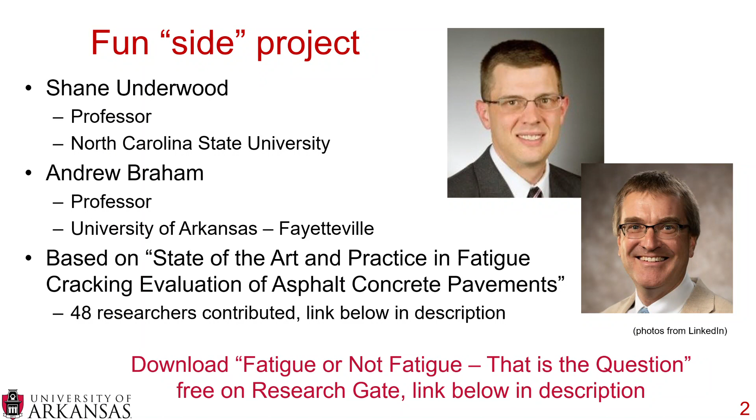So why did Dr. Underwood and I put together Fatigue or Not Fatigue? That is the question. Well, it's because we were struggling to reach a consensus on characterizing fatigue cracking. Why were we struggling? It's because there are over 12 experimental methods and over 12 analysis techniques all dealing with fatigue cracking in the field of flexible pavements.

That's a lot. We know it's a lot because if you look at some other common distresses, such as low temperature cracking and rutting, there are only about 4 test methods for low temperature cracking, and only about 5 test methods for rutting. So compared to those, we have a lot of experimental methods and analysis techniques to quantify fatigue cracking.

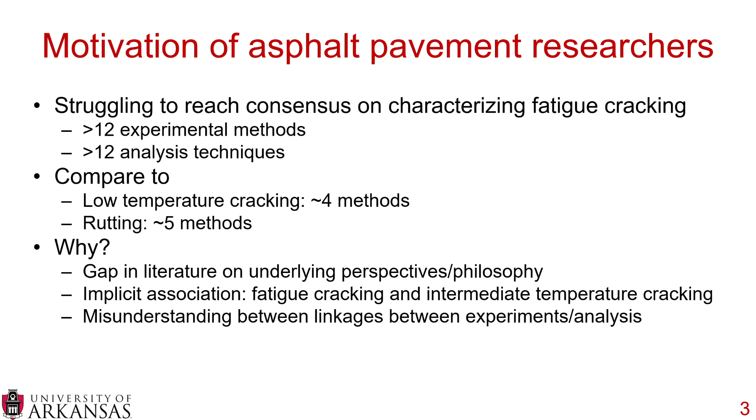Now, why did this happen? We believe there's a gap in literature on the underlying perspectives and philosophy of fatigue cracking. We think that over the years, an implicit association has been developed between fatigue cracking and intermediate temperature cracking. And finally, we believe there's a misunderstanding between the linkages of experiments and analysis for fatigue cracking.

There's quite a bit to unpack in those 3 whys. There's a lot of fatigue tests out there, a lot of fatigue analysis techniques, and those whys are what started motivating us to dig deeper. So how did we begin to unpack this sequence?

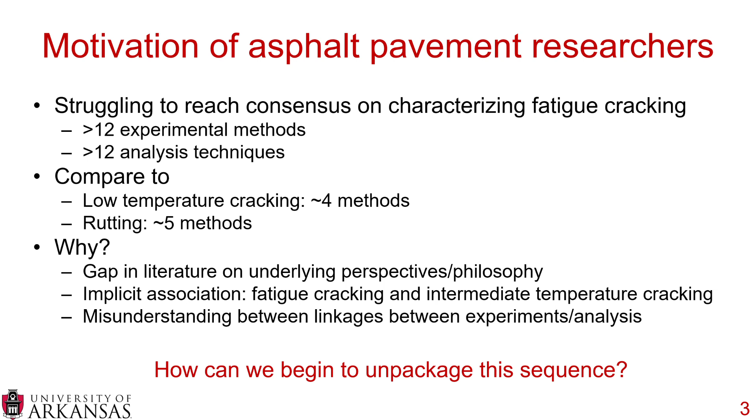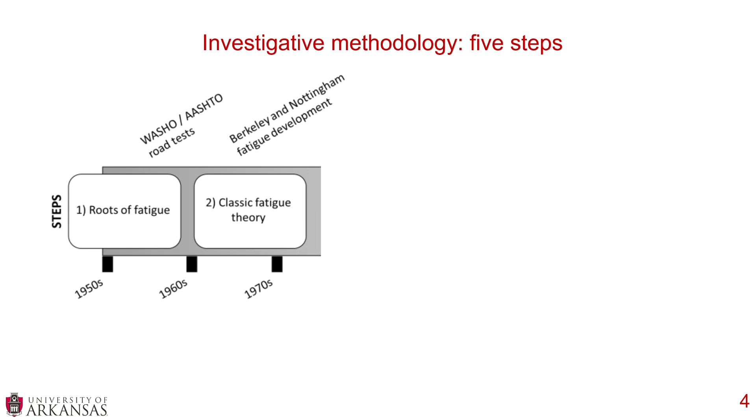We went back in time, back to the 1950s, where we believe the roots of fatigue are held, in the WASHO and AASHTO road tests. These led to classical fatigue theory in the 60s and 70s, led by Berkeley and Nottingham. All of that work in the 50s, 60s, and 70s really led to the road to SHRP, because that work in fatigue cracking led to rutting in our roads.

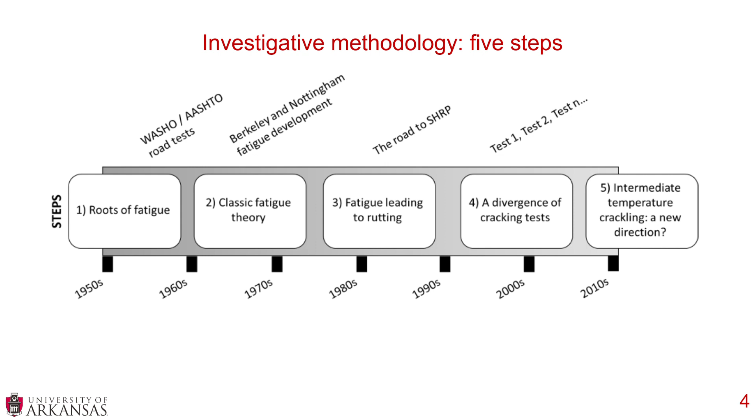After SHRP was implemented, we feel there was a divergence of cracking tests in the 2000s and 2010s, and now we're sitting here in step 5, in intermediate temperature cracking - is a new direction going to go forward?

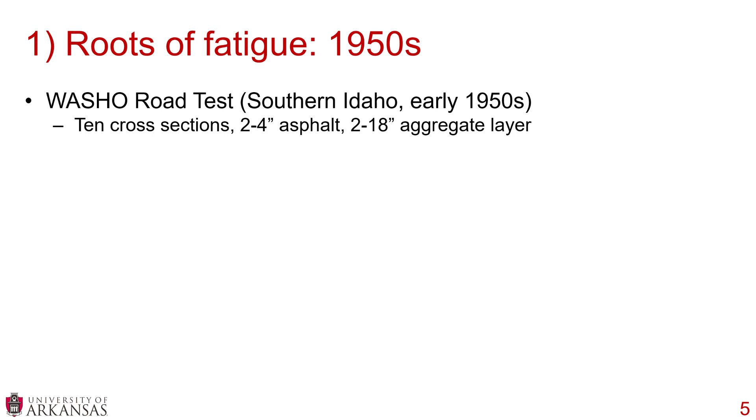Let's start with the roots of fatigue and work through this sequence. The WASHO road test took place in southern Idaho in the early 1950s. It involved 10 different cross sections, anywhere from 2 to 4 inches of asphalt and 2 to 18 inches of aggregate layers. They found that the 4-inch asphalt surface provided a far superior product, and the thicker sections limited deflections on the surface layer and retarded deterioration. Let's keep that in mind - thicker sections retarding deterioration.

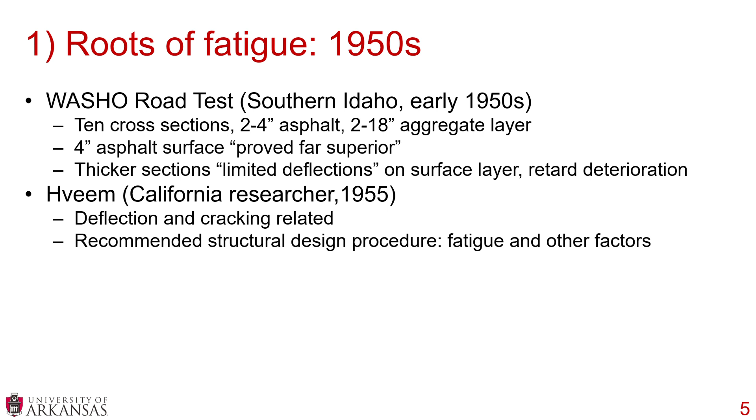Around this time, Hveem in California started thinking about how deflection and cracking were related, and he began recommending structural design procedures that included fatigue and other factors, trying to understand how to relate deflection to cracking and have better structural design procedures.

Also around this time, we had the AASHTO road test in northern Illinois, which showed a shift from soil classification and soil tests to pavement layers. They looked at 3 to 6 inch thick asphalt sections, and also found that thicker hot mix asphalt pavements made for higher performing structural sections.

So going back to the third bullet from WASHO, thicker sections retarded deterioration. Again, thicker sections made for higher performing structural sections.

Another big takeaway from AASHTO was it led to the equivalent single axle load, or ESAL, and the importance of ESALs in pavements. They really ushered in the introduction to looking at what loads were being applied into pavement structural design, which was a very large step in our history of pavement structural design.

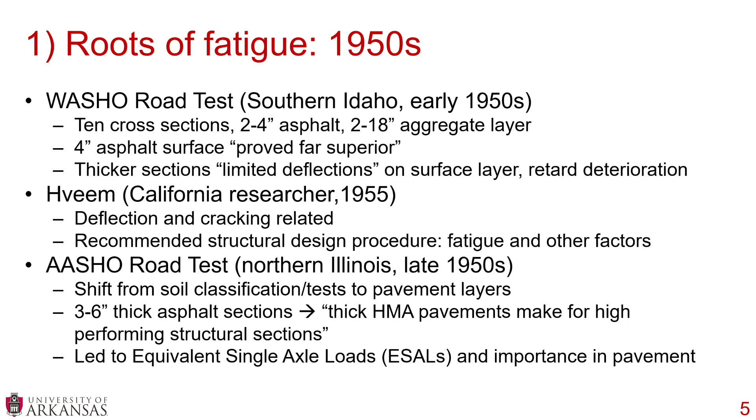So how can we start to move from these roots of fatigue to classical fatigue theory? Well, the University of California, Berkeley and the University of Nottingham saw that these test sections, and noticed that thicker sections were performing better, and so they found that repeated load or fatigue was a prevailing problem in the field, and they set about trying to solve that problem.

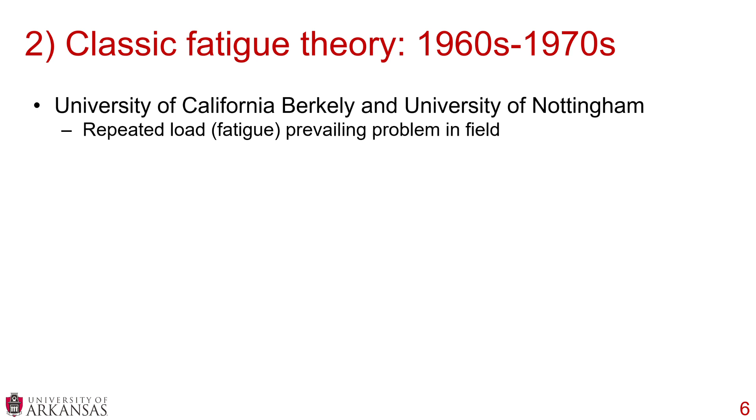This was lab focused, and what they did is they characterized asphalt materials under repeated load, but they also at the same time identified the need to evaluate the materials as part of a pavement structure. So from the get-go, they recognized that we had these material behaviors and we needed to link that to pavement structures. And they knew that we needed a thick enough pavement so the stresses in the pavement structure did not cause excessive deformation, which would lead to fatigue cracking.

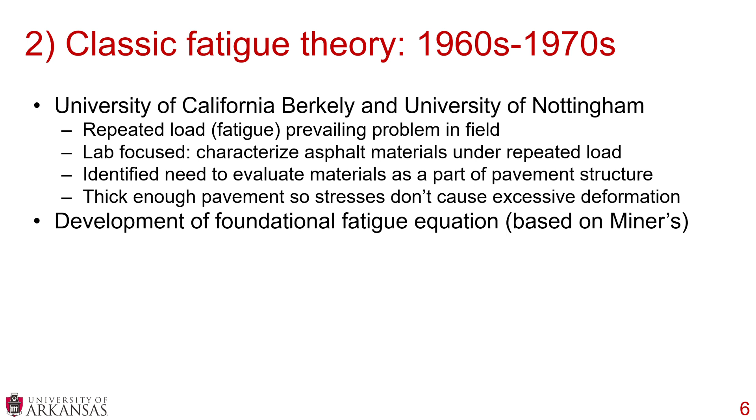And what they did is they started the development of foundational fatigue equations, and they based it on Miner's hypothesis, which is where the number of cycles to failure, N sub F, equaled a constant, which is a material-specific constant, multiplied by 1 divided by the strain, and that 1 divided by the strain was to another material-specific constant power.

Now let's focus a little on this strain, this epsilon sub I. The I indicates load control, and you may also see that as epsilon sub T. So both epsilon sub I and epsilon sub T indicate load control. And you can replace that with an O, an epsilon sub O, which would indicate strain control.

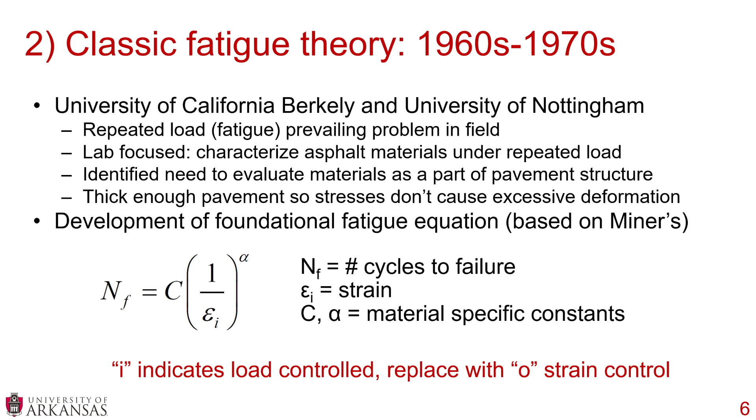Now, stress versus strain, does this matter? In short, yes, it does, very much. And it stimulates a relevant question. Do pavements respond to tire loads like constant stress or constant strain? So as a tire goes over a pavement structure, is it constant stress or is it a constant strain?

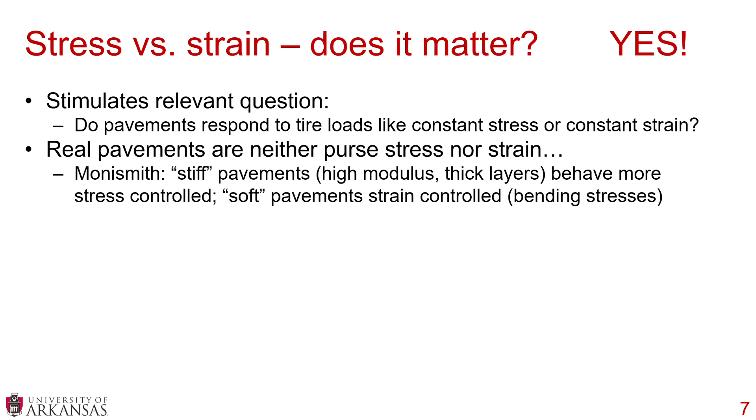Well, according to Carl Monismith, it's really neither. Real pavements are neither pure stress nor pure strain. And that is because stiffer pavements, either higher modulus or thicker layers, behave more like stress control, and softer pavements, lower modulus or thinner layers, behave more like strain control, and you have bending stresses.

Based on that, we have a new component to the fatigue equation, and that's the mix stiffness. And if you incorporate this mix stiffness into the fatigue equation, you simply multiply the mix stiffness to the power of beta, and you get a new fatigue equation. And you can see here epsilon sub T, that T represents that we are in stress control.

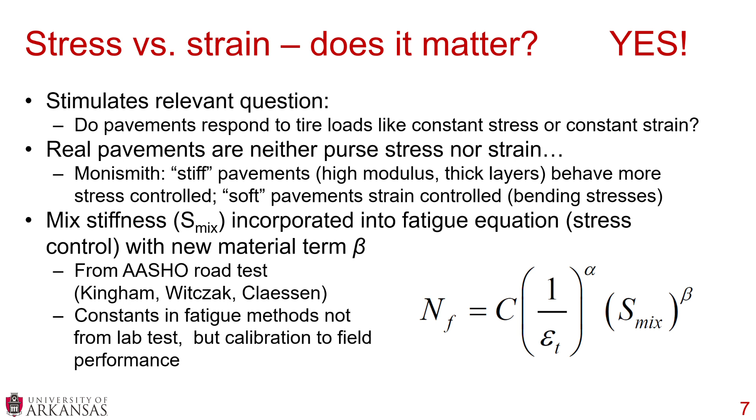Now, this is from the AASHO road test. A lot of work that was done by Kingham, Witczak, and Claessen led to the development of this mix stiffness and also the new material term beta. And the constant in the fatigue methods are not from lab tests, but they're actually calibrated to field performance. And this is a very important distinction here. This means that we're taking the lab behavior and we are actually calibrating it through the material constants to field performance.

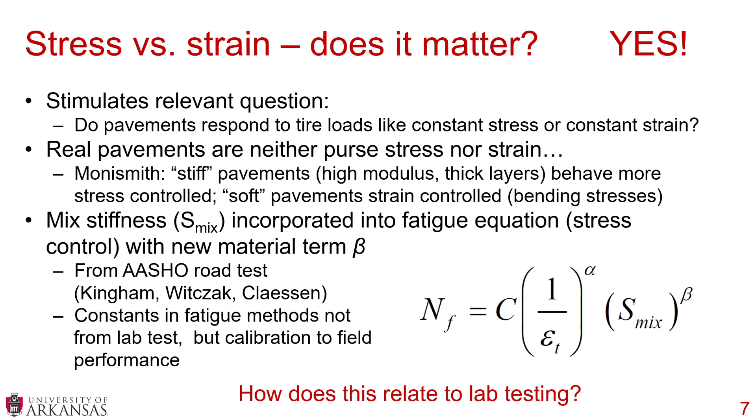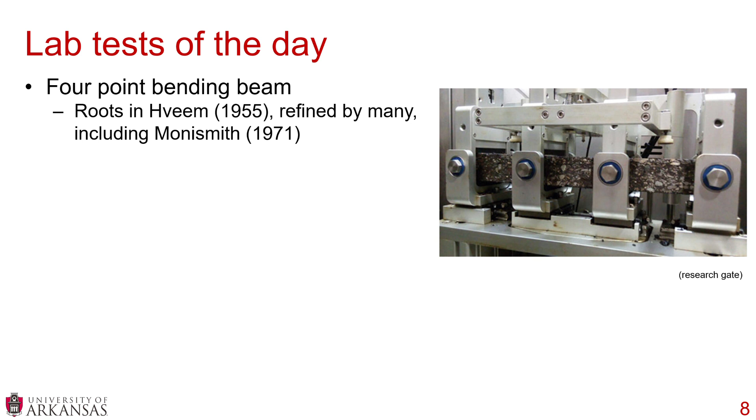Now, how does this relate to lab testing? Well, the test that kind of came out at the end of the day was the 4-point bending beam. And this has roots from Hveem in the 1950s, who we discussed before. It was refined by many, including Monismith, in the early 1970s, but it continued being refined through the SHRP program.

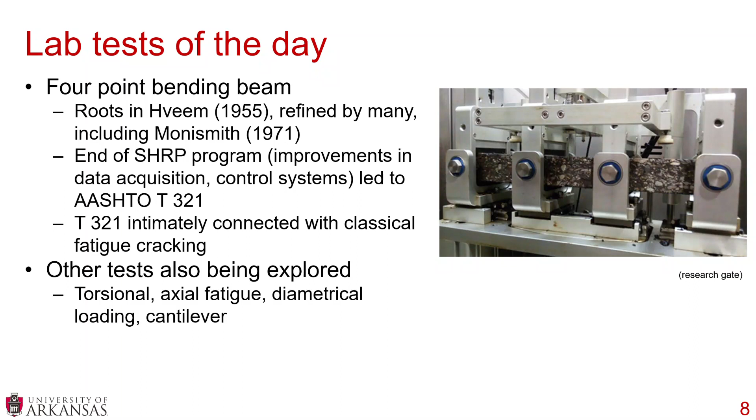Now, there's been a lot of improvements in data acquisition and control systems, but at the end of the day, AASHTO T321, which is the 4-point bending beam, has its roots in Hveem and Monismith. It's gone through a lot of iterations and improvements, but AASHTO T321 is intimately connected with classical fatigue cracking. Now, there were other tests also being explored that never really gained as much traction, including torsional tests, axial fatigue tests, diametric loading, and cantilever. But at the end of the day, the 4-point bending beam test is intimately connected with classical fatigue cracking.

And the definition of classical fatigue cracking is you have cracks in the wheel paths. Those cracks begin at the bottom of the pavement structure and they propagate up. So this is all a summary of classical fatigue cracking.

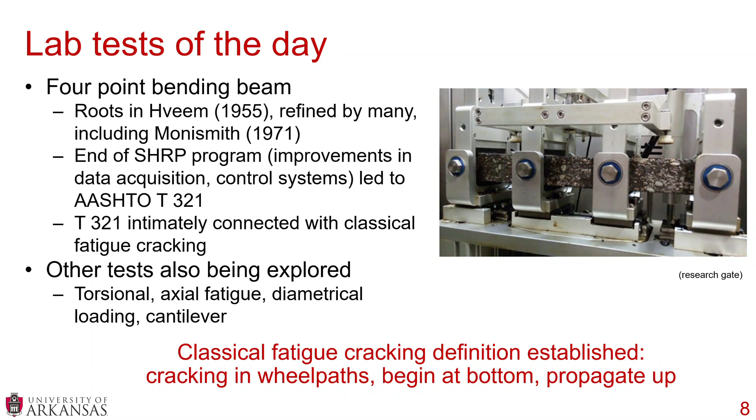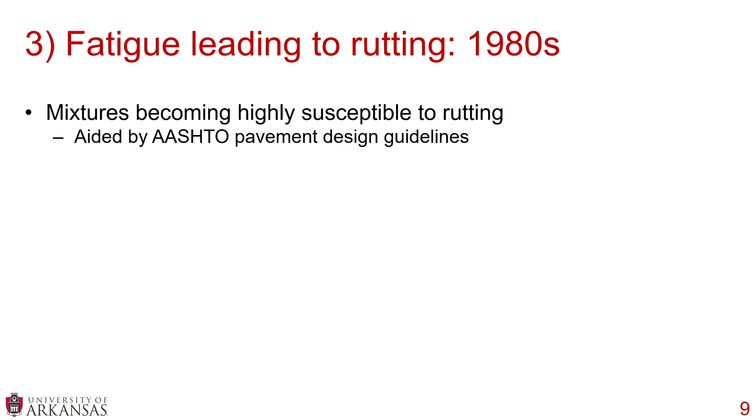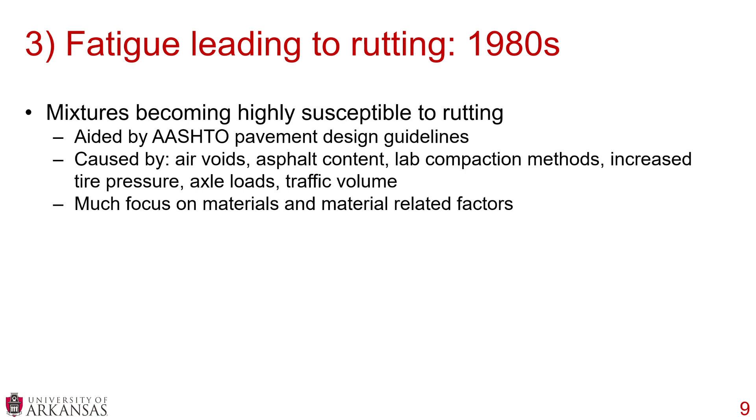Unfortunately, this fatigue cracking work led to rutting in the 1980s, and mixtures were becoming highly susceptible to rutting. This was aided by AASHTO pavement design guides. So all this work was done on fatigue cracking, but inadvertently it started leading to rutting, for various reasons including air voids, asphalt binder content, lab compaction methods, increased tire pressure, axle loads, and traffic volume. The list goes on and on, but much of the focus was on materials and material-related factors.

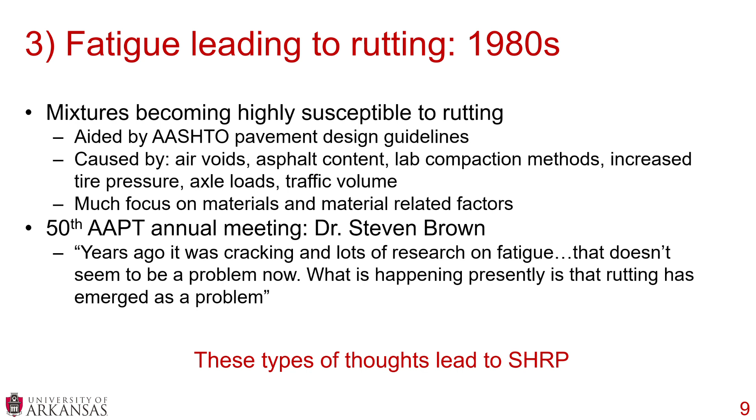There's a nice quote from the 50th AAPT annual meeting from Dr. Steve Brown, who is at Nottingham. He said that years ago it was cracking and lots of research on fatigue - that doesn't seem to be a problem now. What is happening presently is that rutting has emerged as a problem. This is a direct quote taken from the discussion section of an AAPT paper at the 50th AAPT annual meeting. There are many other quotes and papers that reflect what Dr. Brown said so succinctly, and these are the types of thoughts that led to SHRP.

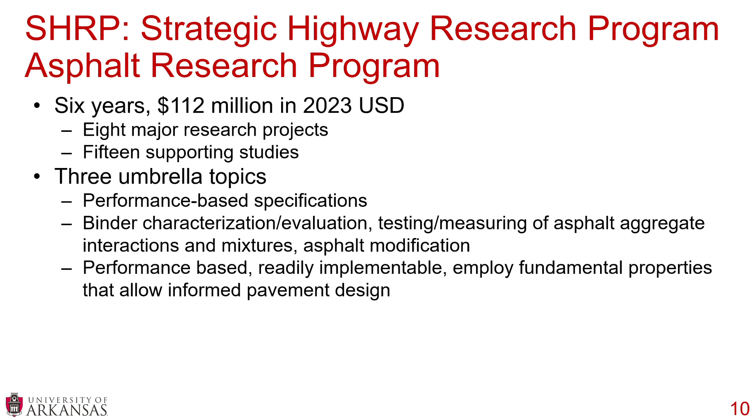SHRP is short for the Strategic Highway Research Program, Asphalt Research Program - much easier to say. This was a 6-year program costing $112 million in 2023 US dollars. It included 8 major research projects and 15 supporting studies. There were 3 umbrella topics: performance-based specification, asphalt binder characterization and evaluation, testing and measuring of asphalt-aggregate interactions and mixtures, and asphalt modification. They wanted performance-based, readily implementable tests that employed fundamental property tests allowing for informed pavement design.

The biggest outcomes at the end of the day were fundamental tests, an emphasis on aggregates, and the SuperPave gyratory compactor.

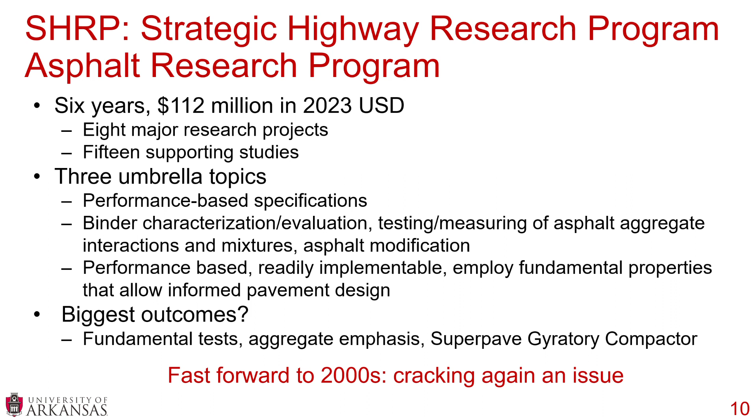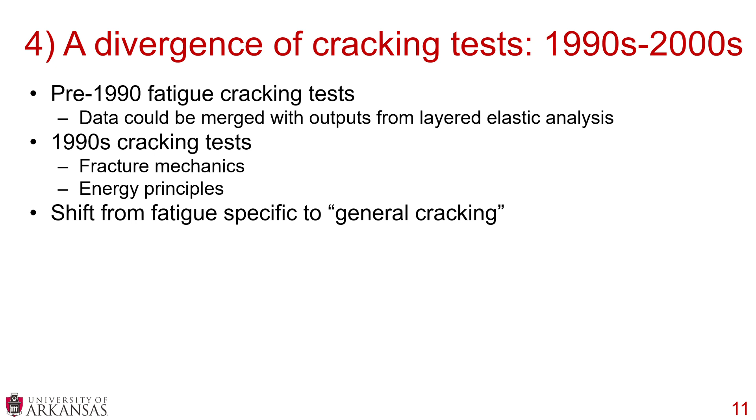Let's fast forward to the 2000s. Cracking again has become an issue, and this is where we start talking about the divergence of cracking tests. The pre-1990s fatigue cracking tests could have their data merged with outputs from a layered elastic analysis in pavement design. The 1990s crack tests have their roots in fracture mechanics and energy principles, and it was a shift from fatigue-specific cracking to general cracking.

Dr. Underwood and I believe that testing temperature is a big part of potential confusion here, because fatigue cracking and intermediate temperatures are closely related. This is just kind of an assumed relationship when we're going through the 50s, 60s, and 70s - fatigue cracking and intermediate temperatures are closely related. Other reasons: at high temperatures, the damage healed, so any sort of high temperature cracking, you really didn't see anything. If you did start thinking about high temperature cracking, you also start looking at low temperature cracking. If you combine those temperatures, it averages to those intermediate temperatures. And the mechanistic design methods use mean annual air temperature, which are intermediate temperatures.

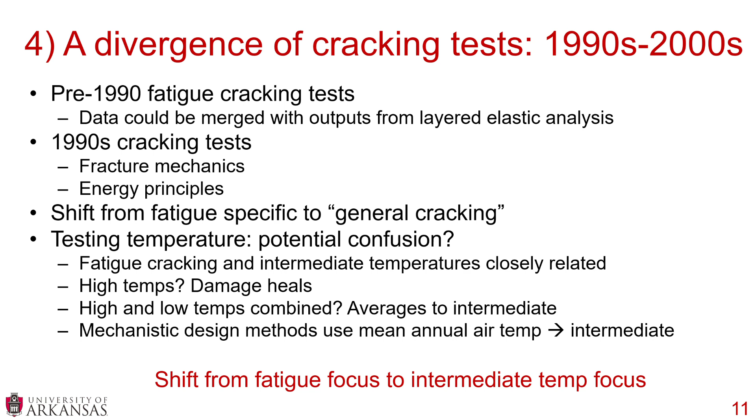So what's happening here is in the 1990s, we're thinking about cracking tests, we're thinking about intermediate temperatures. So we're really seeing a shift from fatigue focus to intermediate temperature focus.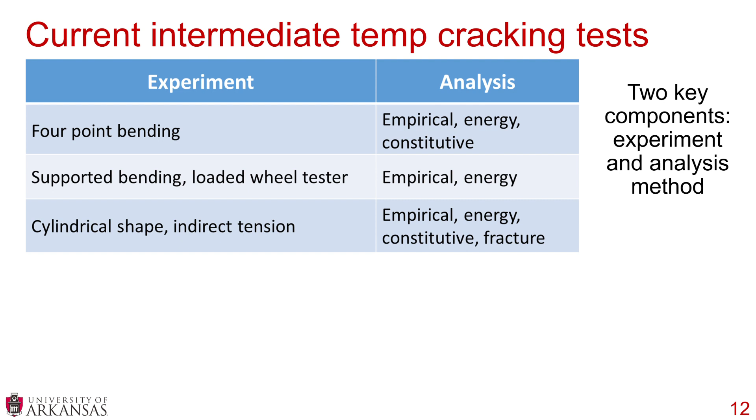As we move forward, we have supported bending and loaded wheel tests, which are empirical and energy analysis based. We have cylindrical shape and indirect tension shape tests, which are empirical, energy, constitutive, and fracture based. We have trapezoidal tests, which are empirical and constitutive. We have overlay tests, which are empirical and fracture. And then a whole bunch of tests - dog bone, semicircular bend, edge notch prisms, and wedge notch test - those are all fracture based.

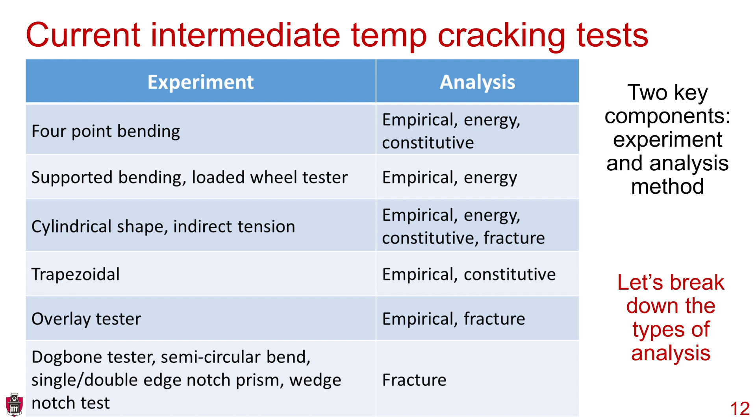If you want to learn more about these tests, take a look at that longer document, because each one of these tests, each one of these analysis components, has a section describing them written by the people who actually developed them. Lots of good information in that longer document. But what Dr. Underwood and I tried to do was collapse all of these experiments, all these analysis components, into a smaller, easier to understand message, and we did that by breaking down the type of analysis.

That was the first step.

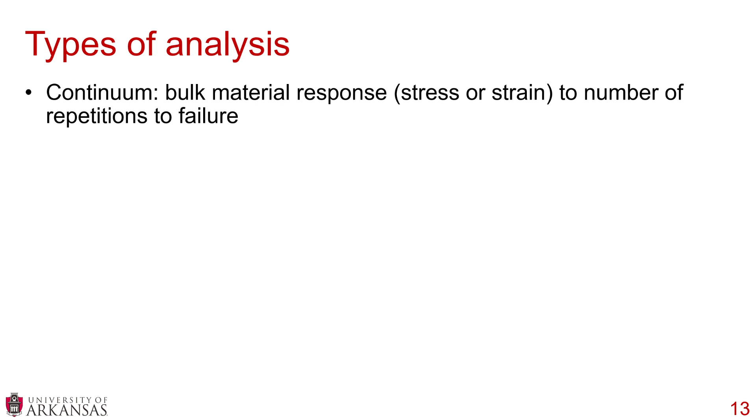If we look at continuum, this is a bulk material response, a stress or a strain, to number of repetitions to failure. Empirical uses continuum. This relies on experiments alone.

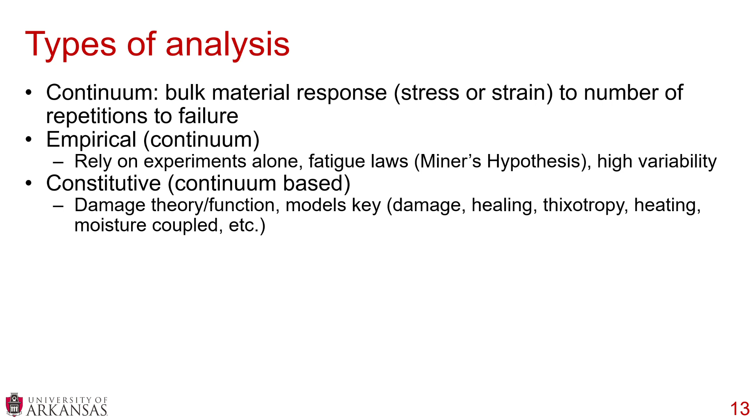Constitutive is continuum based as well. This uses a damage theory or a damage function, but the models are key. There are many different continuum-based constitutive models, including damage, healing, thixotropy, heating, moisture-coupled, many more.

Energy is also continuum. This is somewhere between empirical and constitutive. It uses the input and the number of cycles to failure and couples an underlying mechanism. But all three of these are continuum-based.

They're bulk material responses. Compare that to fracture. These are matured at low temperature, and it can be linear and elastic. Now, fracture has since moved into elastic plastic, viscoelastic, non-linear, but at the end of the day, fracture is not a continuum. There's some sort of existing flaw, usually a mechanically inserted notch, but it doesn't matter at the end of the day what temperature it is. What you do need, though, is that stress concentration in order to get that fracture failure.

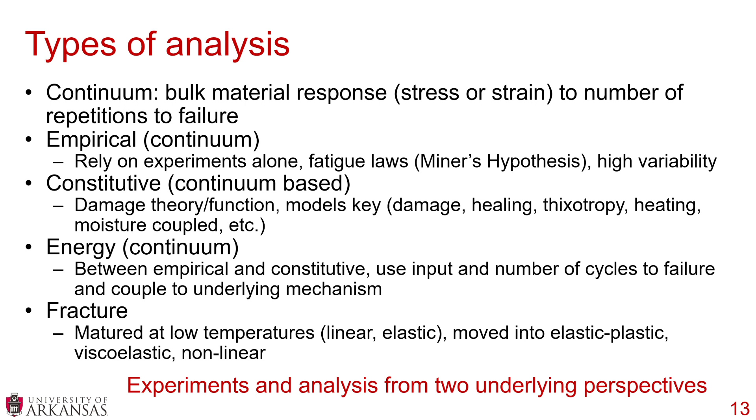And these experiments and analysis are from two underlying perspectives. So we have all those experiments, we have all these different types of analysis, and there's two different underlying perspectives, and that is, are we looking at a structural perspective or a material perspective?

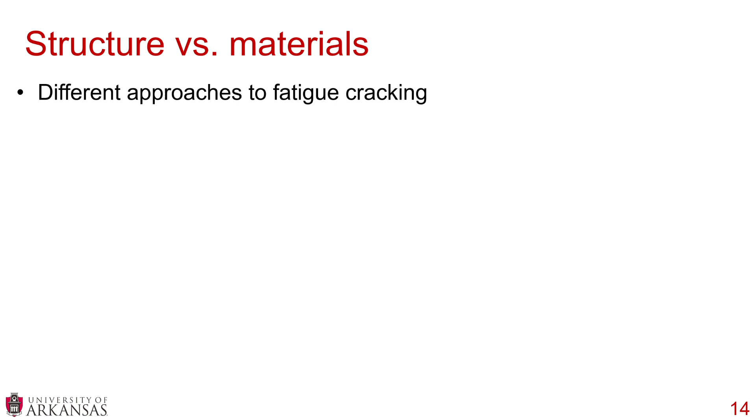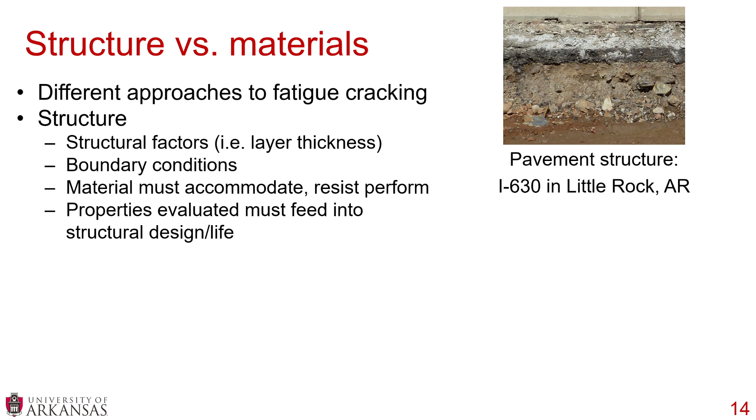These are different approaches to quantifying fatigue cracking. So structural factors include layer thickness and other properties. They have boundary conditions. The materials must accommodate but resist in order to perform. And we need to make sure we evaluate properties that feed into the structural design or life. This all has to do with the structural design focus.

Now compare that to a fatigue or a materials design focus, and this is where you're less concerned about estimated fatigue life, but you're more focused on ranking. So is material A better than material B? It's more focused on accepting. Does material A pass some sort of minimum level, or do you reject that material? And really at the end of the day, you get an index value.

And this is complicated, trying to think, what are we addressing? Are we addressing structural questions, or are we addressing material questions? How do we run a test in order to evaluate a structural issue? Do we just evaluate material issues? So these are very difficult questions, trying to look at the structure, the pavement structure, versus the materials that are within those pavement structures.

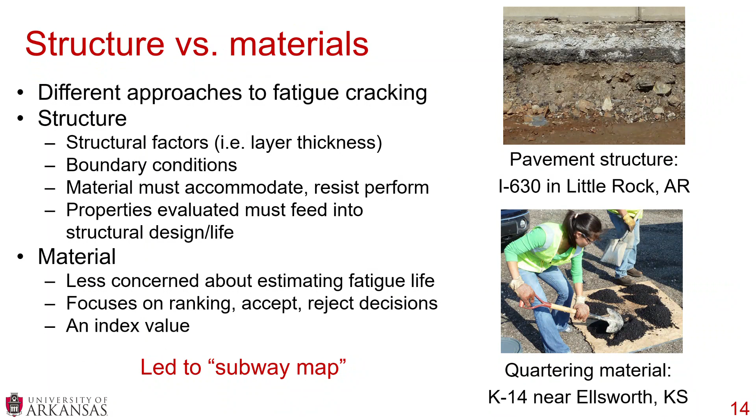And what this did is it led to our subway map. So those of you who have been to London and ridden on the tube, you should recognize this. It's very similar. And what we're trying to do here, this is really the cornerstone, the keystone of Dr. Underwood and I's fatigue or not fatigue paper. And this is the connections between the methods, the perspectives, and the analysis and the experiments.

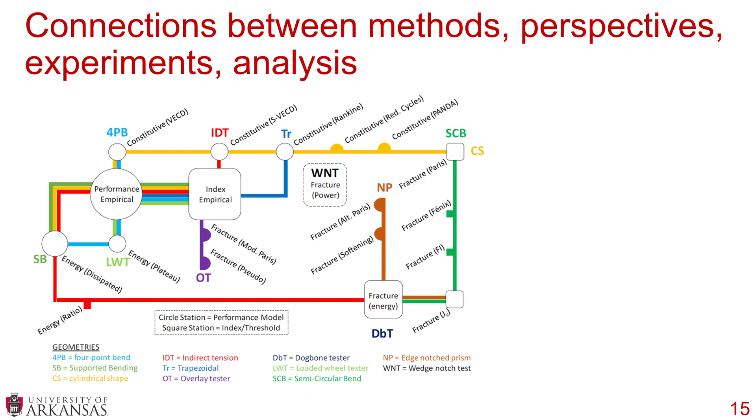And there's a lot to talk about here. I just want to focus on two things. One, what are these stations? If it's a circle station, it's a performance test. If it's a square station, it's an index test. What are the color lines?

The color lines are the test geometry. Is it a 4-point bend? Is it indirect tension? Is it a cylindrical shape? Those are all test geometry.

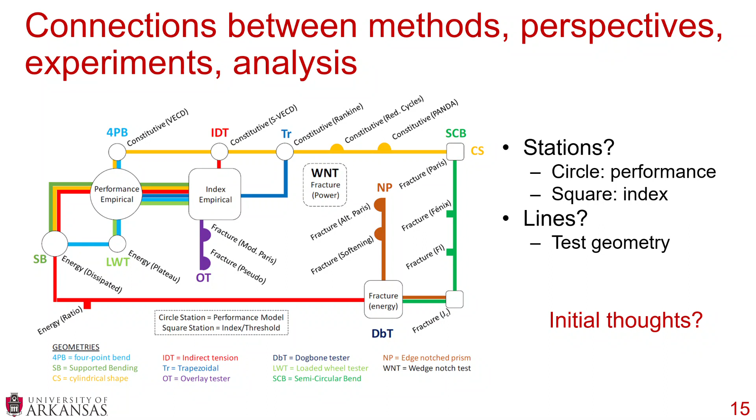Now, Dr. Underwood and I developed this in order to provide a foundation for our community to move forward. Now, we have some initial thoughts, but we want this to be a foundation for our community to move forward. So, what are some of our musing?

All of these test methods were developed continuously in the same general sequence. Someone notices a pavement is failing by intermediate temperature cracking. They develop a mechanical test that is repeatable and it distinguishes between the materials. They generalize that test to other standard materials and they establish a ranking procedure for materials. We feel that this is a specific sequence that every test method should go through in order to establish credibility.

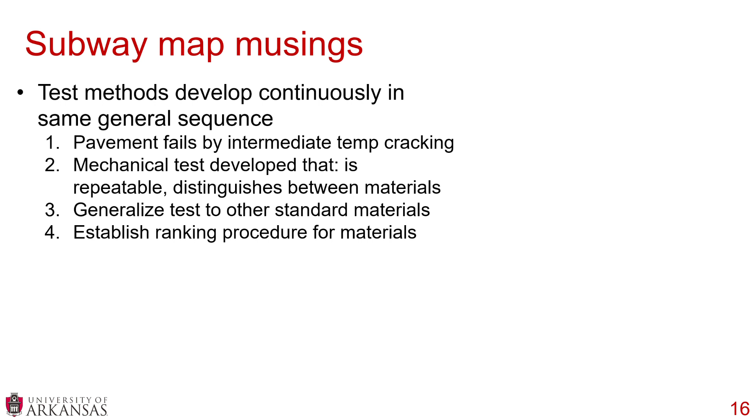Now, we also believe that these tests focus several questions. So based on these tests, based on these musings, what are some questions that Dr. Underwood and I developed? Well, the first is, are index tests beneficial? Are tests that simply rank material that are isolated from structural modeling beneficial?

Are there correct material damage growth viewpoints? Is it important to think about crack initiation? Is it important to think about crack propagation? Do we need to think about both of them? How does this material damage and how does the damage spread? And where can simplifications be made?

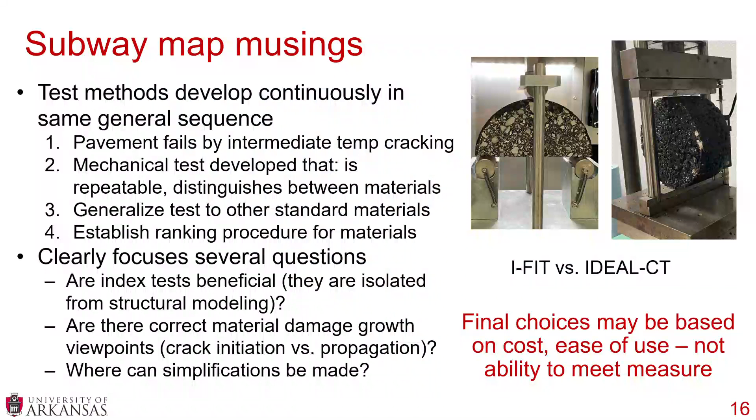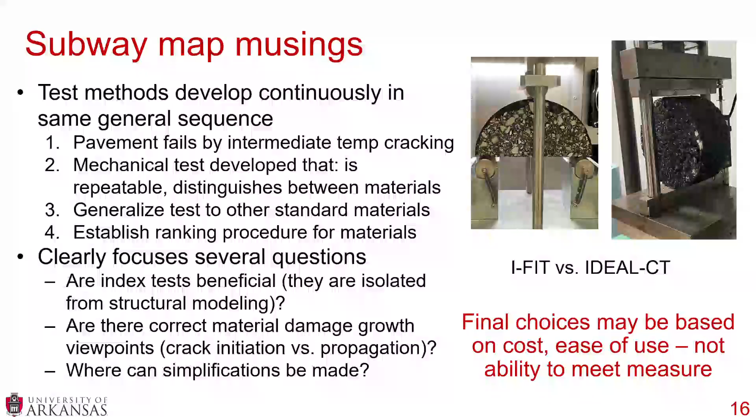This is a very important question, because the final choice of a test may be based on cost and ease of use, not on the ability to meet a measure. So there's a lot to unpack here. We feel that all of these tests need to be developed through this 4-step process, but these tests also need to go through questions about what they're trying to capture and how they're going about it. At the end of the day, when a test is proposed, what is the motivation behind that test being proposed?

So let's take a look at this recap. We went through the roots of fatigue. We went through classical fatigue theory. We talked about how fatigue led to rutting. We talked about a divergence of cracking tests. And we feel that we need to go in a new direction.

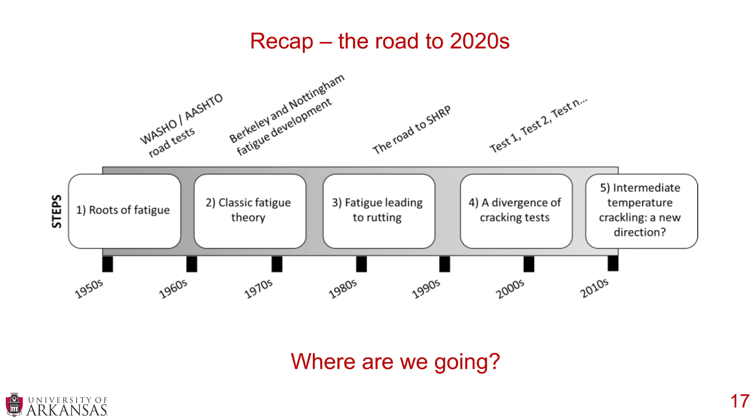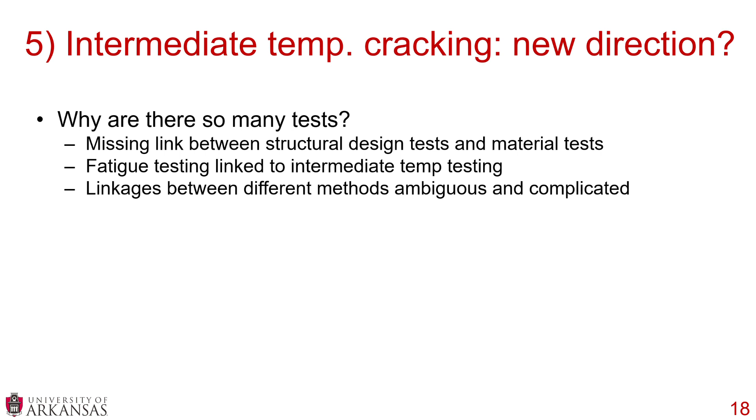So the new direction - why are there so many tests? Dr. Underwood and I personally believe there is a missing link between structural design tests and material tests. We believe that today, fatigue tests are inherently linked to intermediate temperature testing, and that these two terms are too often used simply interchangeably, yet they're very, very different concepts. We believe there are links between the different test methods and the analysis techniques, and those links are ambiguous and complicated.

We think that moving forward, we need to be very careful when we're talking about cracking. We hear a lot of talk, I have used it, about the pendulum analogy. We had too much cracking in the 60s, the pendulum was on the left. In the 80s we had too much rutting, the pendulum was on the right. Now in the 2010s and 2020s we have too much cracking, the pendulum's back on the left.

We need to be very careful with that, because the cracking in the late 2010s may not be that classic fatigue cracking from the 60s and 70s. Therefore, talking about a pendulum again implicitly starts tying fatigue cracking to intermediate temperature cracking, which we believe is a dangerous assumption. So fatigue cracking does not necessarily equate to intermediate temperature cracking.

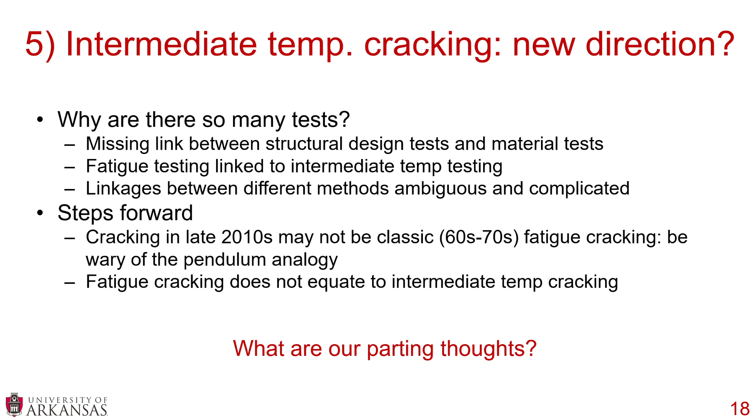Lots to think about here. Again, we're academics - we provided a foundation for moving forward. We're not here to supply all the answers necessarily. We think this is an incredibly complicated problem, but we want to try and provide a foundation to move forward. But we do have some parting thoughts.

We believe there are three gaps in fatigue cracking in today's thought process. We feel that newer tests are on islands, and there's little or no framework to build bridges between these islands. The same can be said for analysis techniques. We believe a lot of our mindsets are based on traditional testing and traditional analysis, and that could cloud our judgment as we're developing these newer tests.

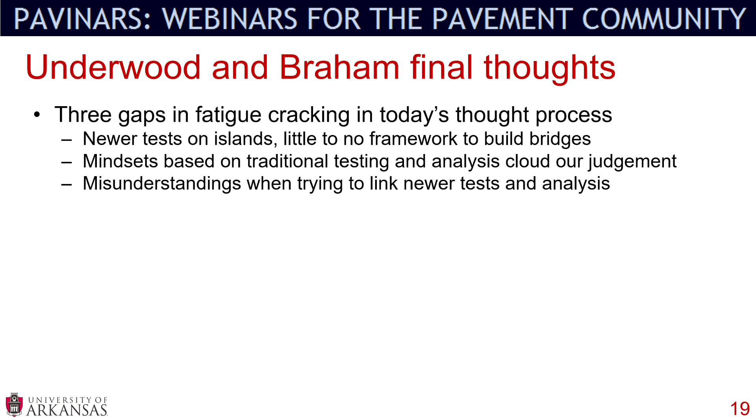And we think there are misunderstandings when trying to link our newer tests and analysis together. We have over 12 different tests, we have over 12 different analysis techniques. We think there are misunderstandings when trying to link those all together. We're certainly not in the 60s anymore - the cracking of today is not the cracking of pre-SHRP.

We also believe that the 60s cracking tests, for example the bending beam, had a robust foundation, and that foundation has a lot to do with tying it to structural design. If you recall, when we were talking about Monismith and Brown, when we were talking about Nottingham and Berkeley, from step one they were talking about how to tie this to structural design. We feel that's not happening. We're doing a lot of material tests now, and we're not tying it to structural design, and because of that our newer tests are lacking such a solid foundation.

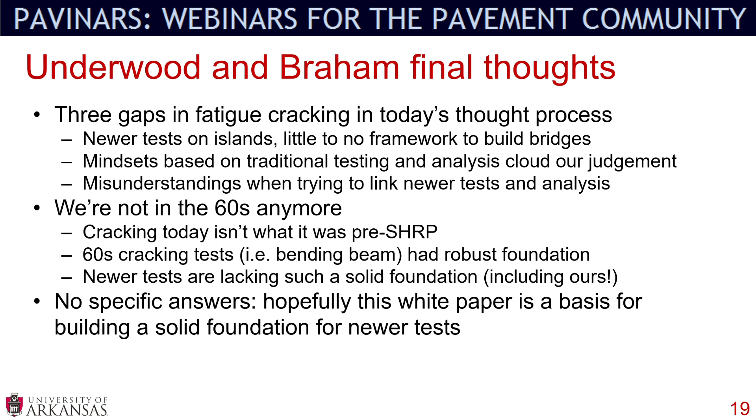And that includes the tests that Dr. Underwood and I work on - we both dealt a lot with cracking. We are not immune to this. We believe, though, that we need to be part of a solution moving forward. Again, there are no specific answers, but we hope that this white paper is a basis for building a solid foundation moving forward for newer tests.